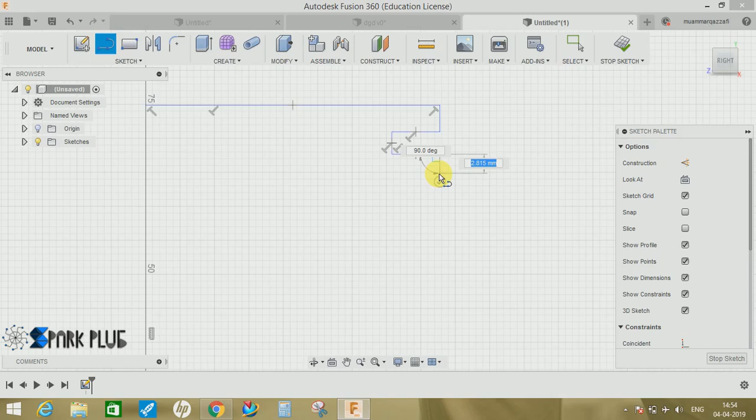Click on select sketch and click on any plane you want. Start by making a vertical line of any dimension. Now click L for line and draw one horizontal line, go back downwards, then again inward, downwards, outwards. Repeat these steps continuously 3 times, like I am doing.

Basically we are making the slots for the piston. So we have 1, 2, 3, and go down and join it with the vertical line you have just created. This is how your profile will look like.

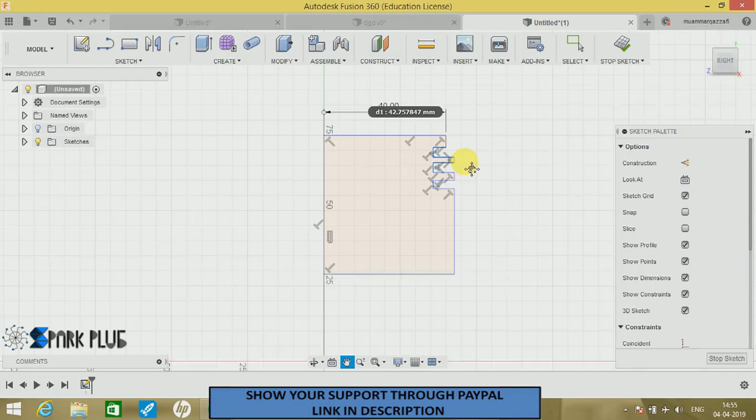Click on dimension D and give this profile a dimension of 40 mm. Remember, all the dimensions have been assumed. The focus is just to teach you guys how to do this in Fusion 360.

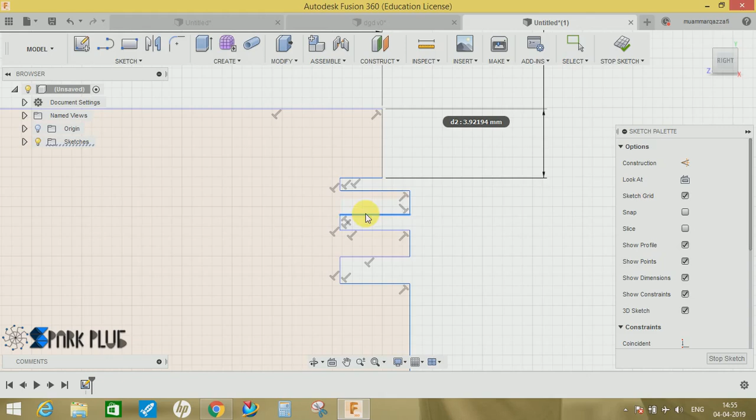Now this will be 7 mm. Let me just drag this down. Press D again, make this 4 mm. This line will be of 2.

Again this will be 4 mm. Make this also 4 mm, and make this also 4. This would be, let me just check, 2 mm. This would also be 2 mm.

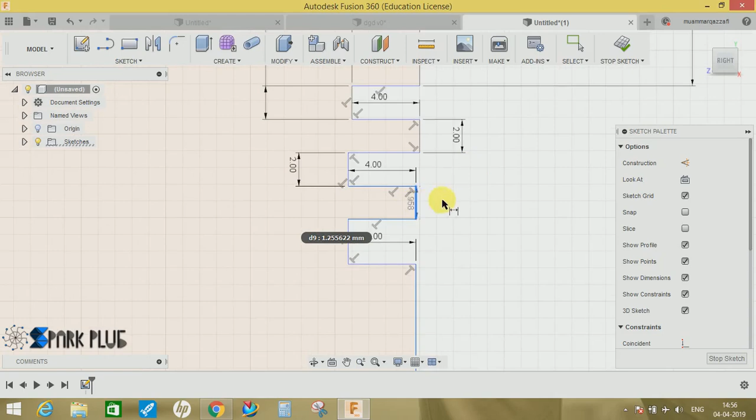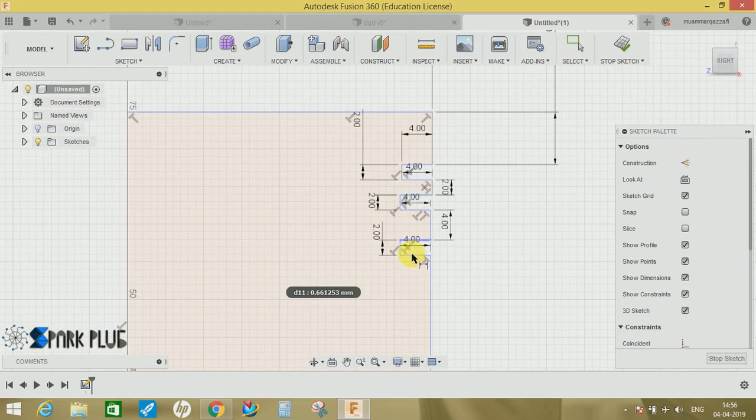The last one would be slightly larger, 4 mm. We have 1, 2, and the third slot would also be 2 mm. So this is how our profile will look like, with one slot, the second slot, and the third slot. Once done, give the last dimension to this line as 36 mm.

Once done, click on stop sketch, go to create, go to revolve, click on this as profile, and use the axis with the vertical line you have just drawn. Go to operation, click on new component, and press OK. This is our piston started taking shape.

Go to component, right click, double click, and rename this component as piston. Now again click on sketch.

Unhide the initial sketch we have just drawn. Again click on that front view, and what we have to do is draw a vertical line from this point to this point.

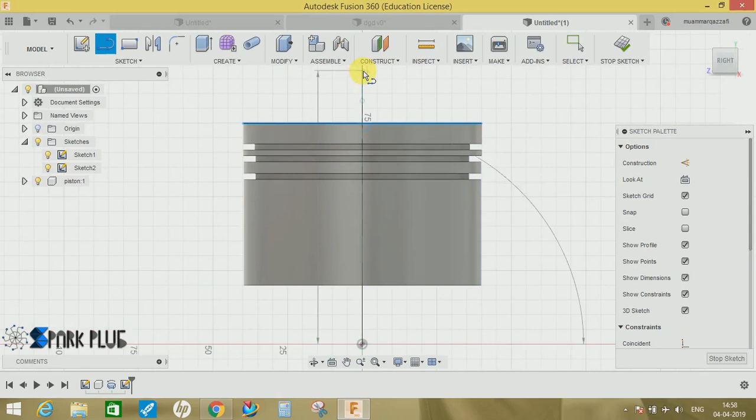On this vertical line, make a point. Click on sketch and go to point, and on this very vertical line we have to make a point. I don't know why it's not snapping, so for now just delete these lines or hide the first sketch which we have drawn.

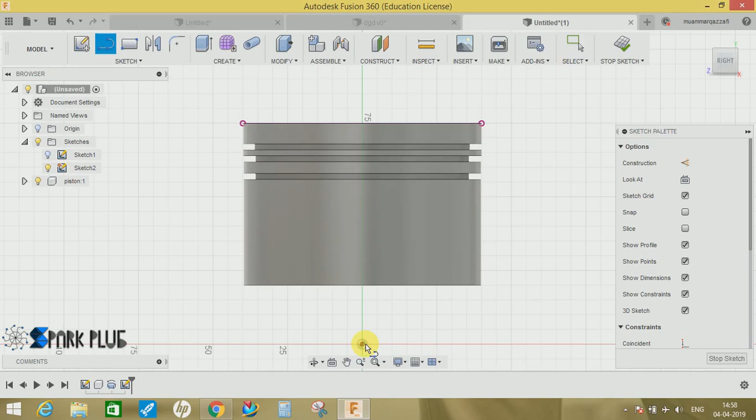Click on point from the origin, draw a line from origin, click on sketch, click on point, a point here. Click on dimension, make the dimension of the point from here as 10 mm and press enter.

Now make another point P on this curve here. Again press D for dimension, give its dimension from this point as 4.5 mm. Once drawn, click on the mirror command, select this point, and the mirror line would be the vertical line you have just drawn.

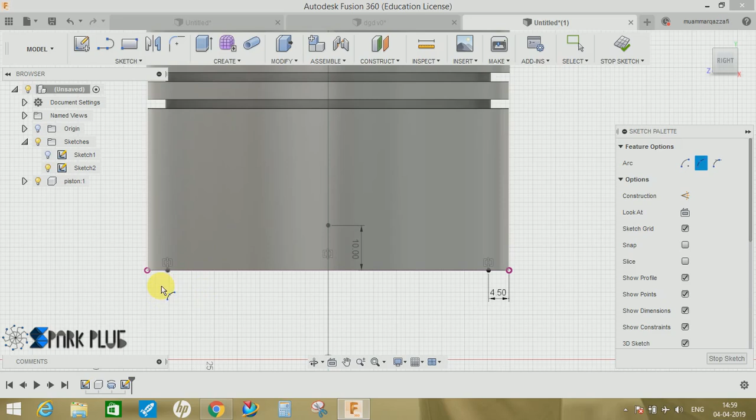Press OK. Now again go to sketch, go to arc, 3-point arc. Select the 3-point arc. The first point would be this, second point would be this, and the third point would be this. Once drawn, just close this figure as a rough sketch.

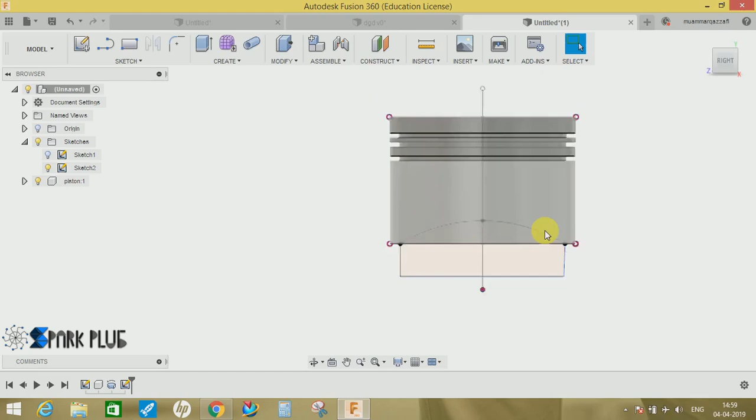Now you have just closed this figure. Click on stop sketch. Now once done, just hide this sketch for now. Again go to this, click on the bottom of the piston and click on create sketch.

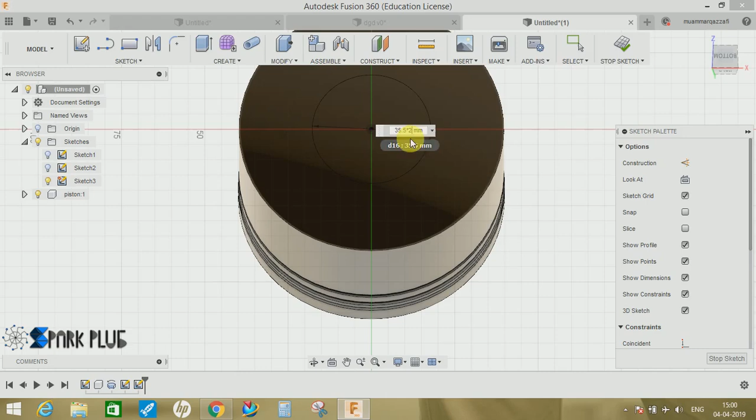From the center, draw a circle of diameter 35.5 and press enter. No, it's not diameter, actually it's radius, so we have to multiply it by 2 to make it diameter. So just make it 35.5 into 2, that's equal to 71 mm.

Click on stop sketch. Again we have to make a hole through it, reverse the direction, and the distance would be -50. Press enter. So we have created the piston. Now unhide the second sketch we have drawn.

We have to extrude cut a profile through the bottom of this piston. Click on the extrude command, select these profiles, and click on symmetry, and make an extrude cut through this profile.

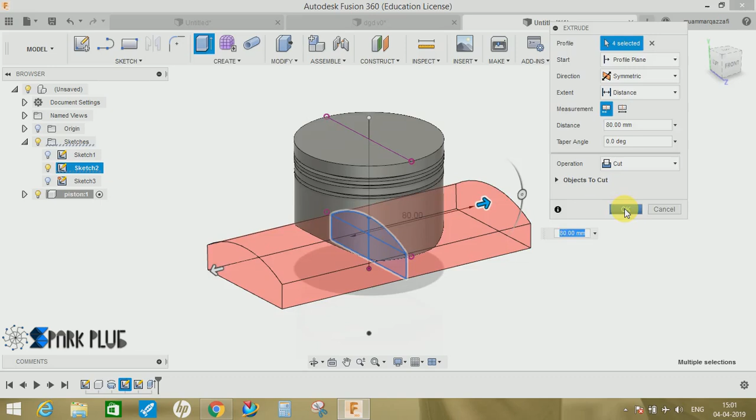Now the next step is to make a hole for the piston pin and the area where your connecting rod would be assembled. For that, again go to sketch, click on the front view, and on this very center line draw a circle of diameter 10 and press enter.

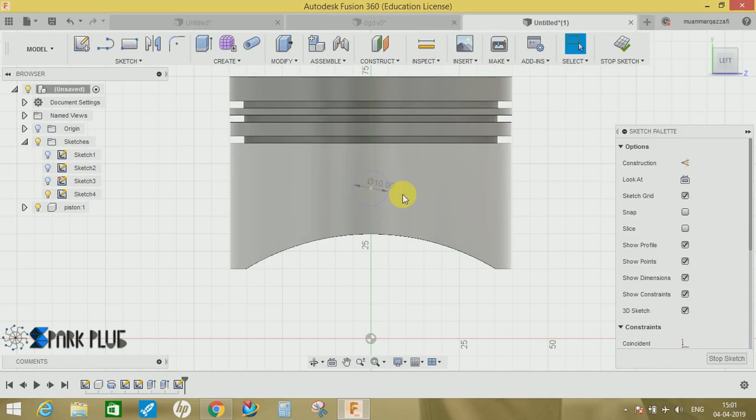Click D for dimensions, click on the center and the bottom profile, and the distance would be 24 mm. Again click on stop sketch, click on extrude command, make the direction symmetric, and cut a hole through it.

Our piston is completed. All we have to do is make a slight fillet here to look it more beautiful. A fillet of 5 would be okay, and press OK. Now the next step is to make the connecting rod.

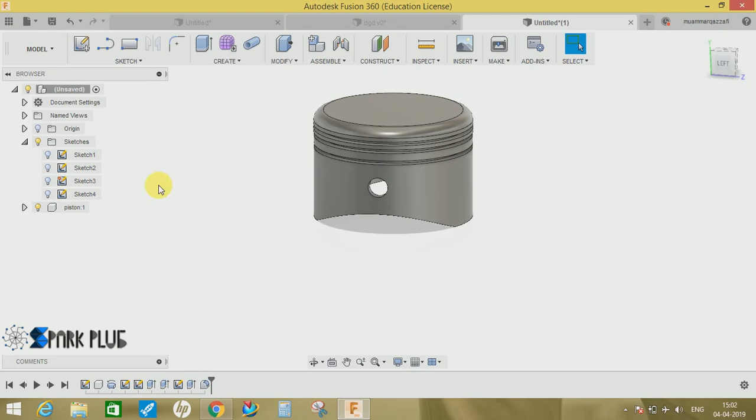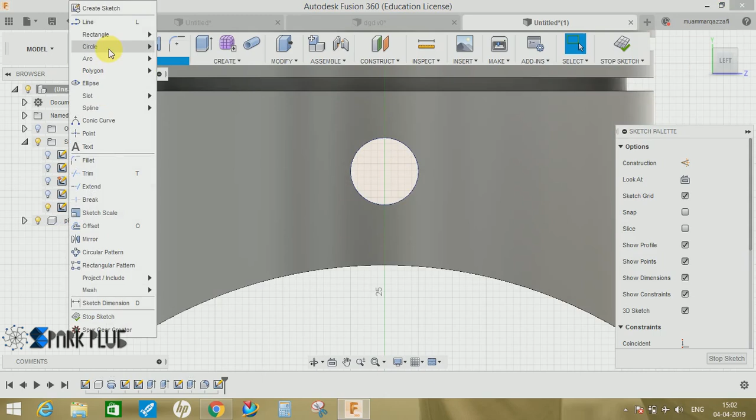For the connecting rod, again click on sketch, click the front plane, and start by drawing a circle in the middle. For that, press P for project and project this entity, then press OK. Now go to circle, center circle, and click 2-point circle, drawing from this point to this point so we can get the center of this circle.

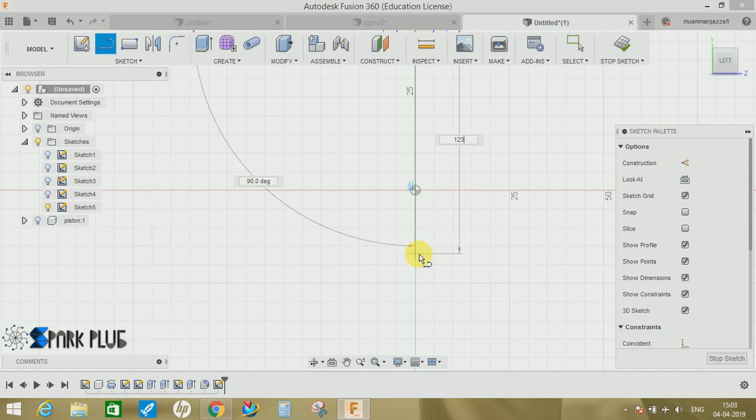Press C for circle and draw a circle of diameter 17 mm, press enter. You can hide the piston from here for now, you don't need it. Click on line command by pressing L and draw a vertical line of length 123 mm, press enter. Once drawn, click C for center circle and from the bottom of that line draw a circle of 46 mm diameter.

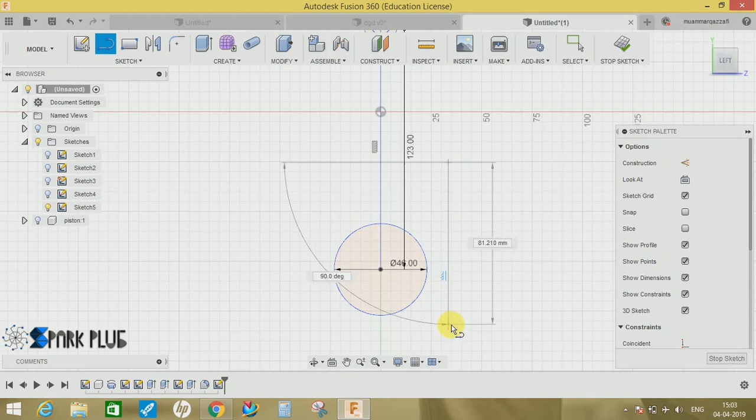Then draw a vertical line just beside that circle, press D for dimension, and give the dimension from the center as 36 mm, then press enter. Now press L for line, draw a horizontal line from the center of this circle, press T for trim, and trim these two lines. Then we have to make two tangent lines from this point of the circle.

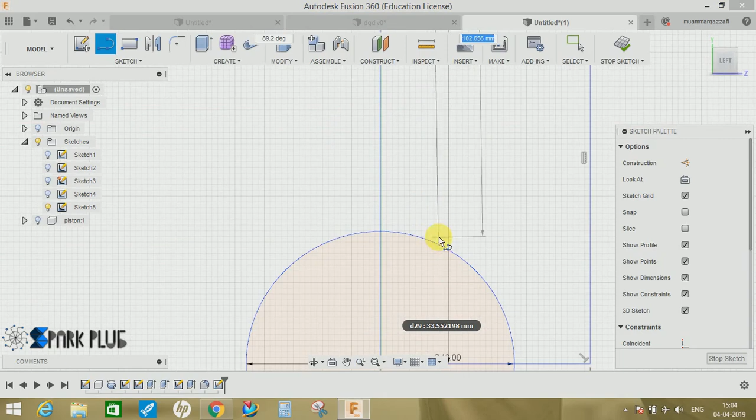Press L for line, from this very point draw a line vertical, parallel to the center line, up to somewhere here. Now press dimension D and make the dimension of this line as 25 mm.

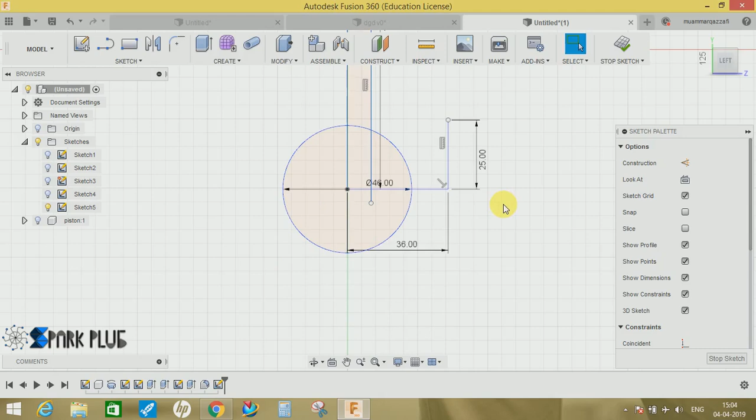Now we have to undo this. First, make this circle by clicking on the center point, right click, and click on fix, so it cannot be moved from its original position. Now rename this dimension as 25 mm.

Press L and join these two lines, then press T for trim and cut the extra line. Now choose the fillet option, click on this line and this line, and give it a fillet of 25 mm.

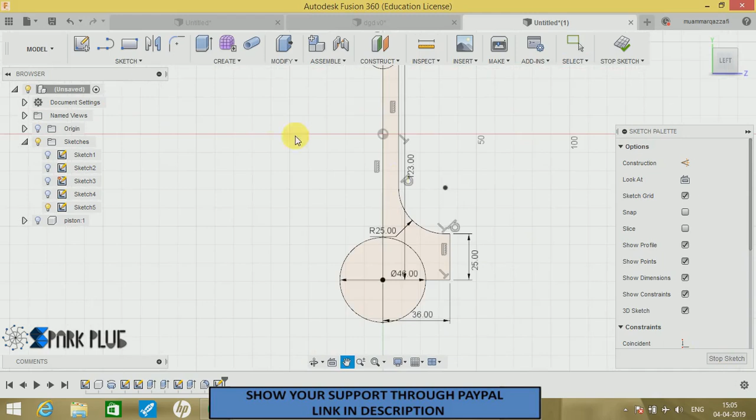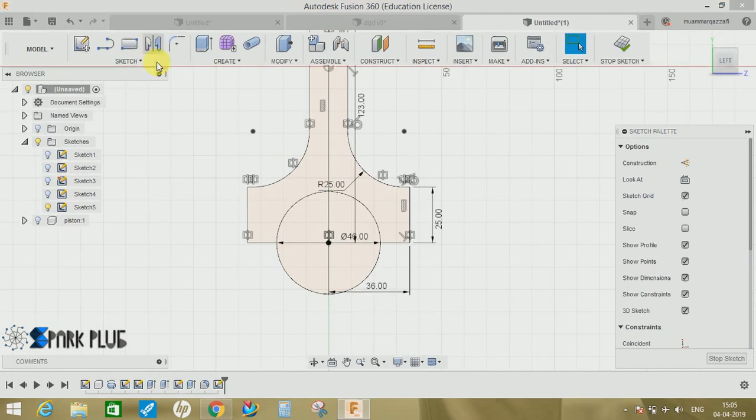Press enter. Now click on the mirror command, select this entity, this radius you just created, and all the lines you just created. The mirror line would be the center line again, press OK. Now mirror these two lines again with reference to this line, press OK.

Now join these two lines so that we have a closed entity. Next step is to make a slot between these profiles.

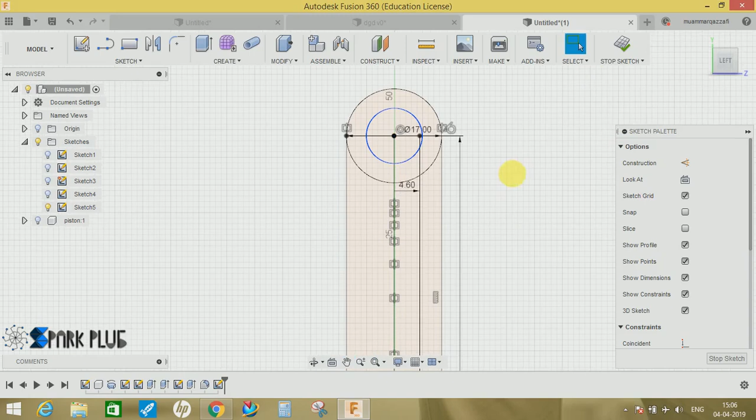For that we have to click on sketch and go to offset. Click on the center line and offset it to a distance of 4.6. Do the same on the other side, or you can mirror this line like this.

Next, draw a circle on the center line with diameter 9.2, so it becomes tangent to this line. Press D for dimension and give the dimension of this circle as 15.

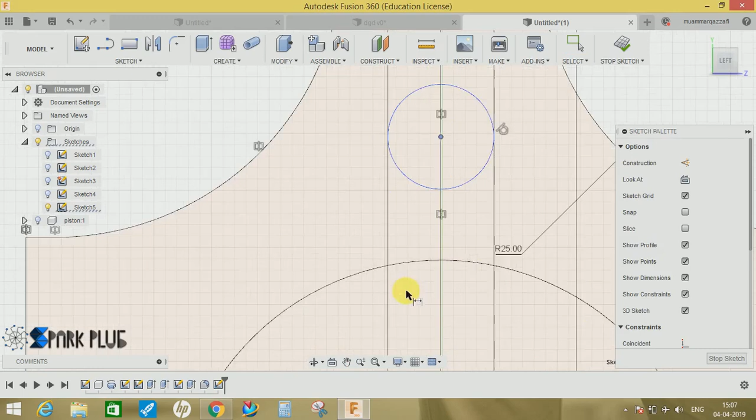Same thing would be done here. Draw a circle on the center line, joining these two lines, and give the dimension of this circle from its center as 35.

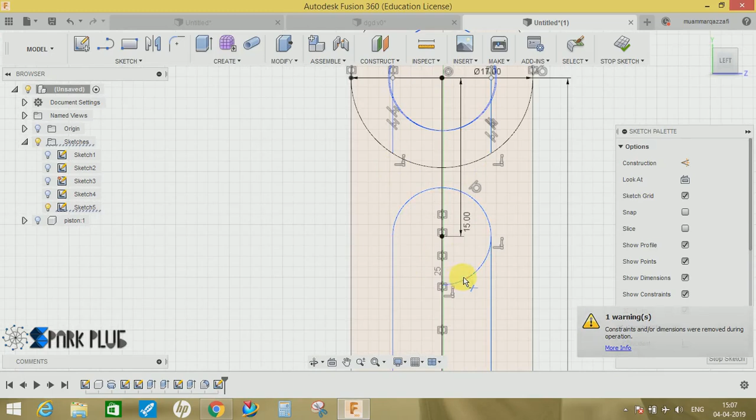Now we have to trim some extra lines. Press T for trim. We have to trim this line, this one, and similarly here. Just delete this excess line.

I accidentally deleted the circle by mistake, let me delete the projected one. We can make the circle again here. The diameter was 17 - sorry, the diameter was actually 10. The smaller circle was 10 diameter.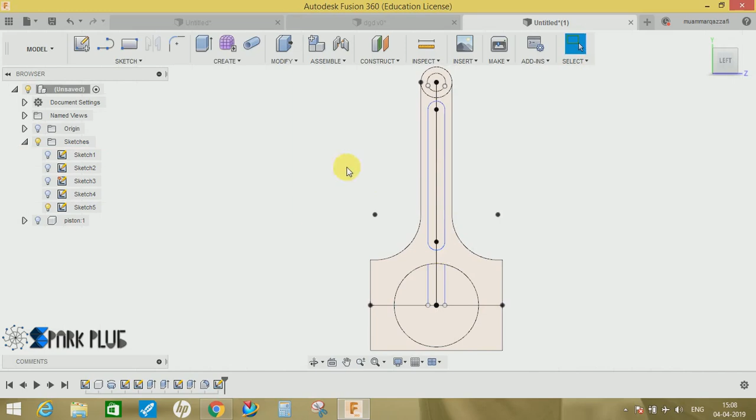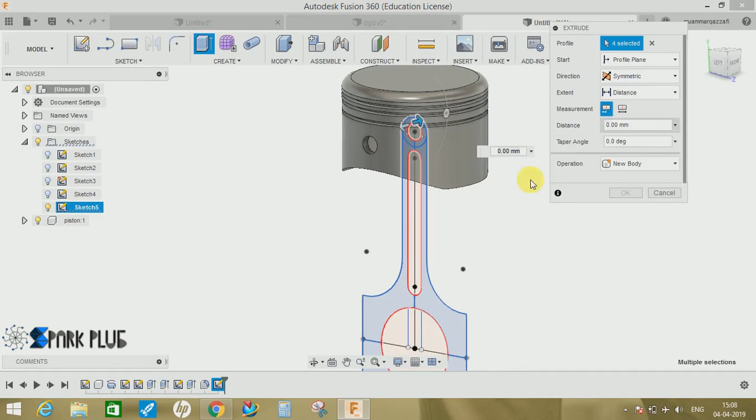Once the sketch is completed, click on stop sketch. Now bring back the piston like this. Again click on extrude command, select the faces like I am selecting, except for this hole, this slot, and the slot here which will be for the piston pin. The direction would be symmetric, and this time the distance would be 10 mm both sides. Click operation as new component and press OK.

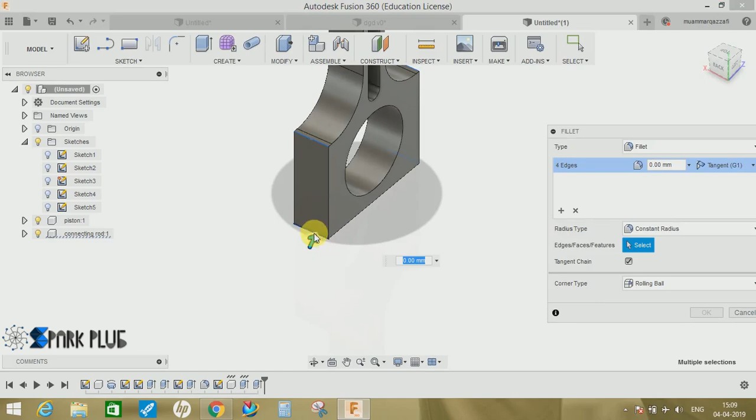Now rename this component as connecting rod. Before moving forward, go to modify, go to extrude, extrude the lower face by 5 mm and press OK, join. Now go to modify, click fillet, select this edge, this one and this one also, give it a radius of 14 mm and press enter, so we have a beautiful connecting rod made here.

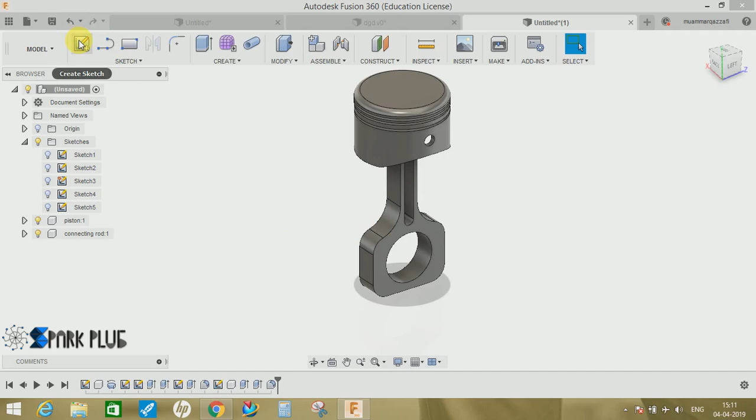So the next step is to make the crankshaft. To do that, click on sketch, click on the front plane, the mid one, and press OK. Now press C for circle, but before that press P for project and project this entity onto the plane you just created. Press C for circle, and from the midpoint of this profile draw a circle of 70 mm diameter.

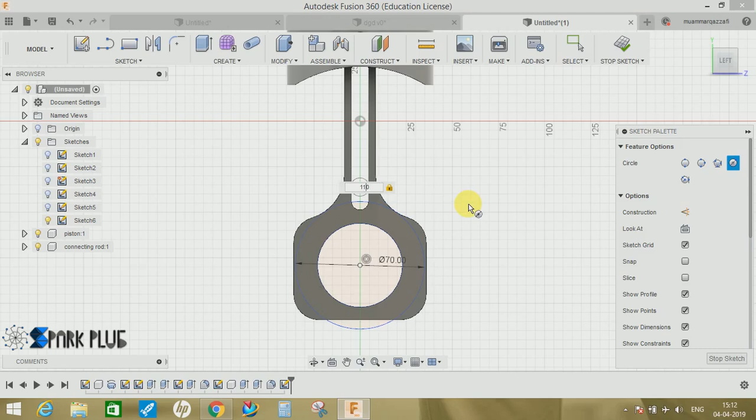From this point again click project, making the projection at some point higher than this point. Draw another circle of 110 mm diameter. Now right click on this circle, the first circle, and make it fixed. Now again press D for dimension, and make the dimension of these two circles as 36 mm.

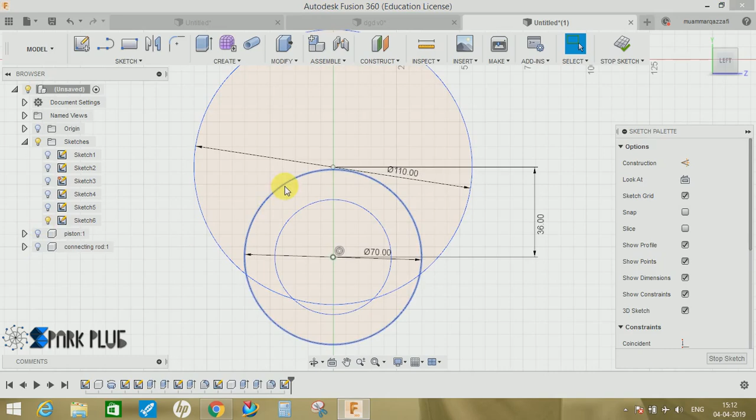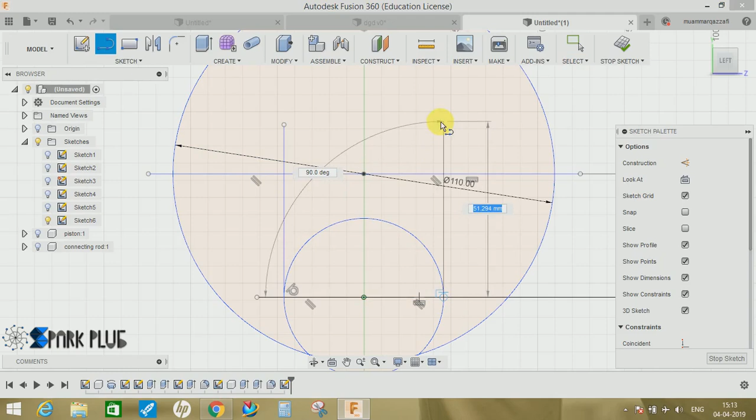Press L for line, draw line 1 from this point horizontal both to left and right side of the circle. Repeat this step in the smaller circle also. Now once done, press L for line, and from this point draw a straight line cutting to the horizontal line of the bigger circle. Again press L and repeat the same step for here. Again draw a vertical line, press T for trim.

Trim this excess entities that we don't need. Just follow my step and just remove the excess part that is not for our use.

Now once done, click on the fillet, click on this sketch and this and this and this, and make the radius of 25 mm and press enter.

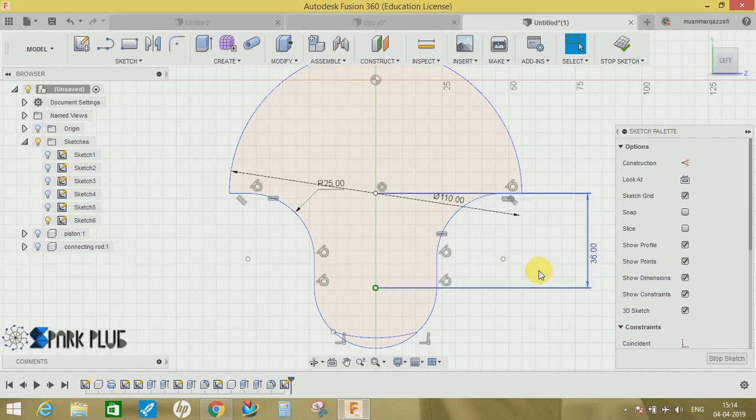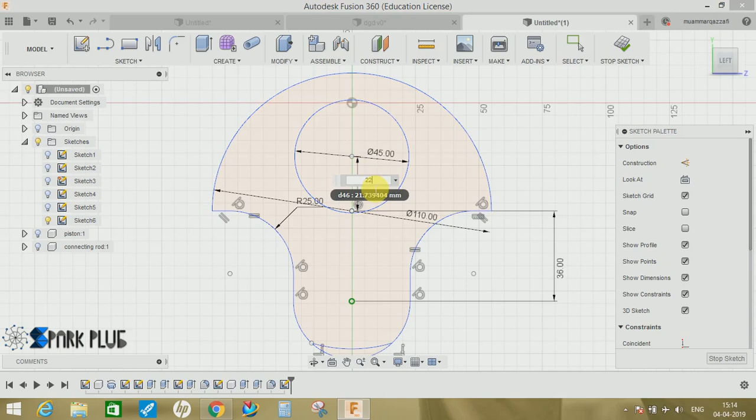Once done, on the same projection draw a circle of 45 mm diameter, and the distance from this point to this point would be 22 mm and press enter. Once done, you can just stop the sketch.

Now bring back the piston and connecting rod once again, and what we have to do is we have to create an extrude of this profile. So click on this profile and extrude it up to a distance of 25, and click on new component, make it 20 mm.

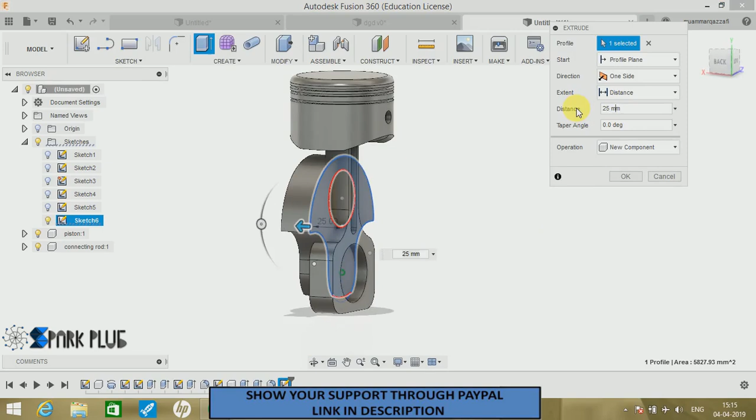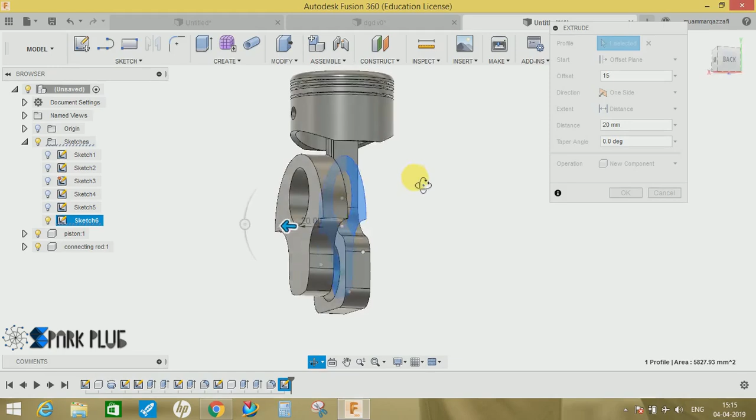The next step is to click on start and click on offset plane. So offset plane would be 15 mm. It will look somewhat what it would look like this. So once done, press OK.

Now again click on extrude, bring back the last sketch we have drawn, repeat the same step but on the right side this time. So for that there is two options.

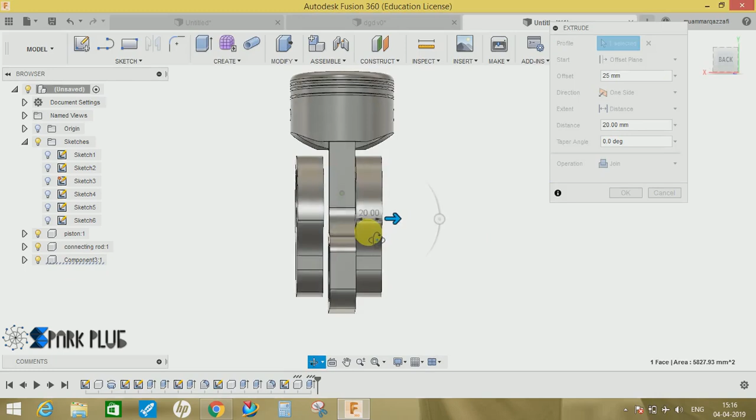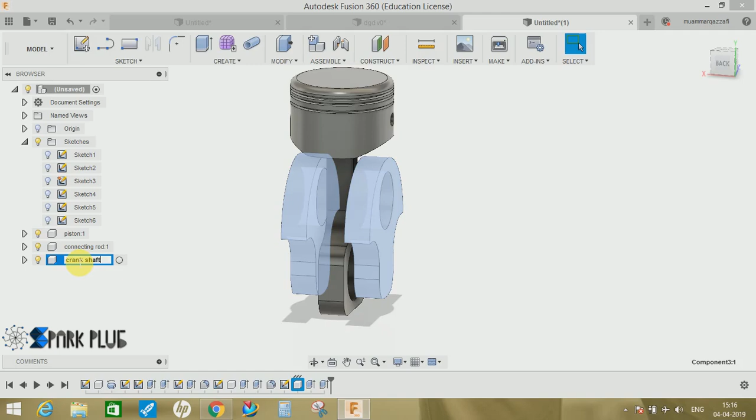So we have a new body here. We name this as connect crankshaft. Now we have to make a joint between these two so that they can move with respect to each other.

For that, we for now just hide the piston and the crankshaft connecting rod as well.

Now again click on sketch, click on this face, and you can press P to project this circle, press OK, click on stop sketch.

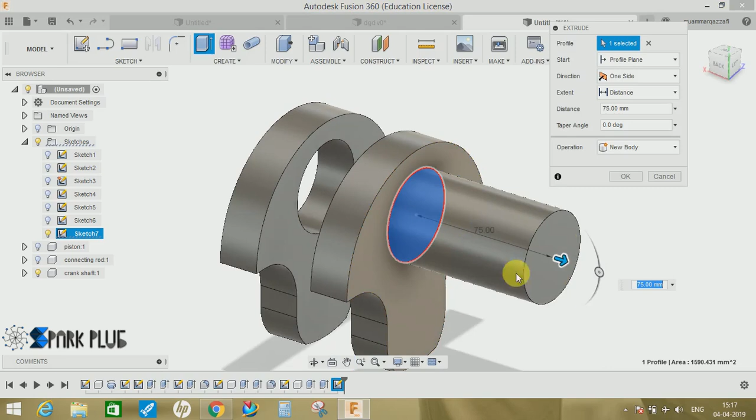Now click on extrude it up to a distance of, I need roughly distance, we don't need to give this an exact dimension. Click on symmetric, click on no, click on two-sided, and the second side would be, first of all we have to just make it on one side only.

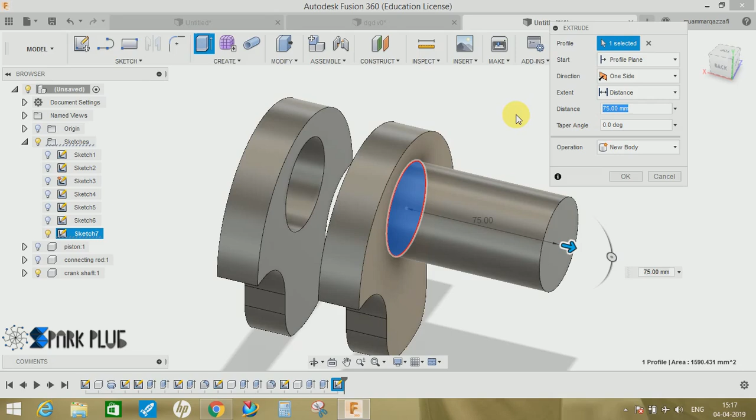Click on one side and give it any dimension, let's say 75 mm. Click on join, and now click on two side and make a fillet.

Press OK. Now again click on extrude, click on this profile, go all the way up to here, click on join, again two-sided, make this side somewhat like here and press OK for join. So we have a profile that looks like this.

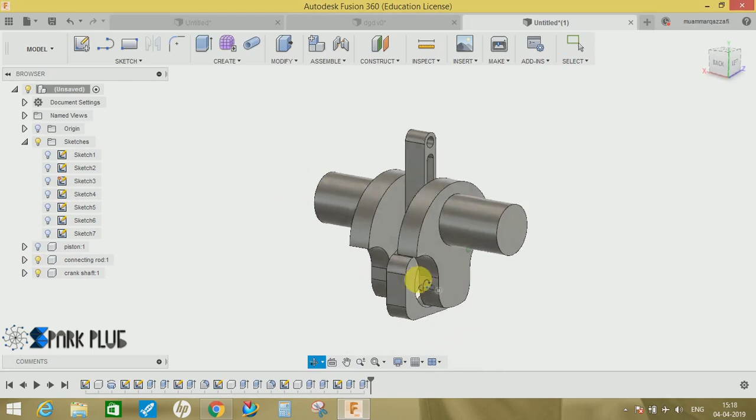Now bring back the connecting rod. What we have to do, we have done something wrong in the previous sketch we have drawn, so we have to make a correction. Actually, we have created a hole which is larger than the crankshaft we have created.

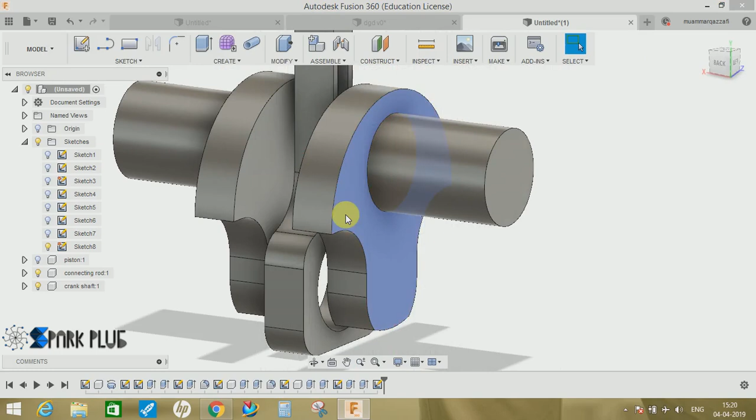So for now, just go back to the 3D environment and bring back the sketch for the crankshaft we have drawn initially. So in that, double click on this sketch so that we can edit the profile. So just hide the crankshaft for now.

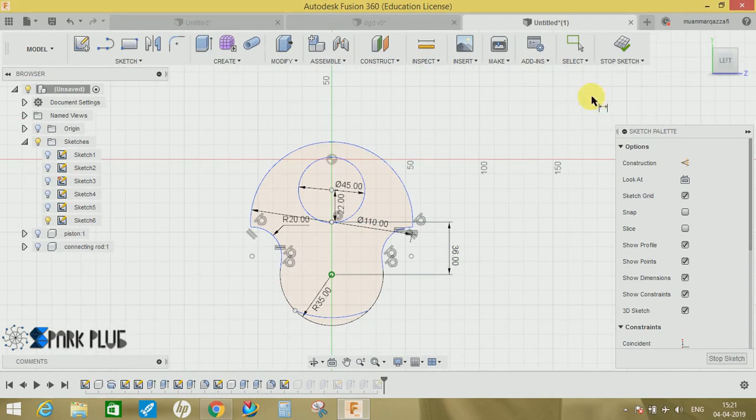First of all, change this radius to 20, and the next is to press D for dimension and give the radius as 23 mm now. Make it as 35 mm and click OK. Now all the rest are OK. Just stop this sketch.

Again we have to go back to the timeline. Find the extrude that we have used to make this profile. Select this curve also and click on join and press OK.

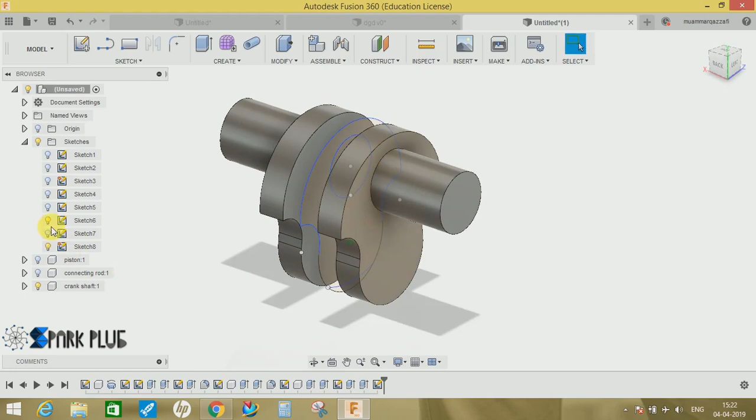Now we have just created the crankshaft, a perfect one. Nothing is wrong in this. Again let's move forward. For that, bring back the connecting rod as well as the piston.

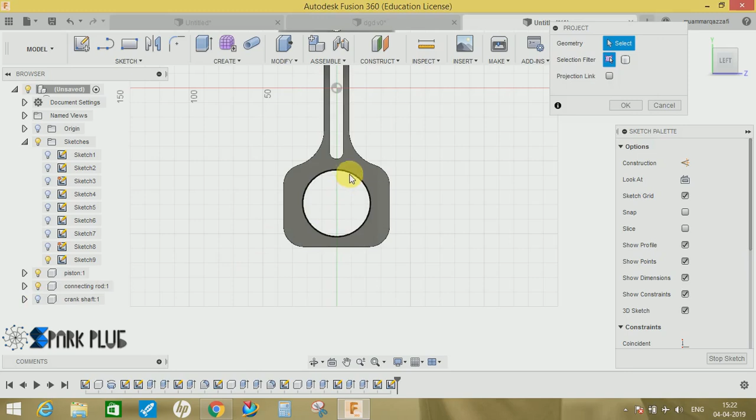For now, click on the sketch, the center one, and press OK. This to hide the crankshaft for now. Press P to project this. Press P, select this profile and press OK. Now stop the sketch.

And click on extrude button. Bring back the crankshaft. We don't need the connecting rod now. So what we have to do is we have to select this, click on symmetric and extrude it till it merges with the crankshaft, and the operation would be join and press OK.

Bring back the connecting rod. So we have created all the necessary elements that are needed for the assembly of the piston cylinder.

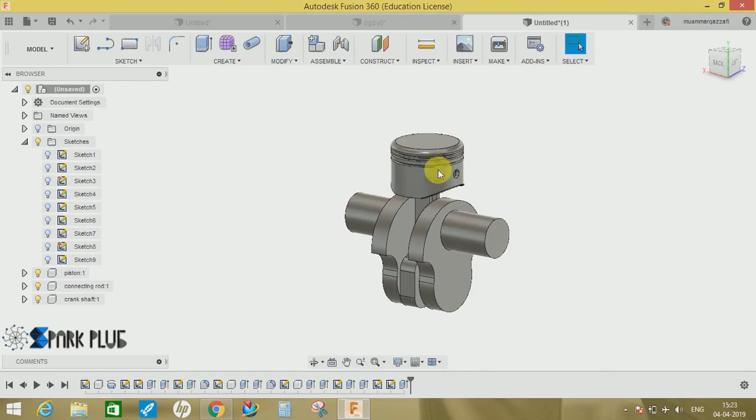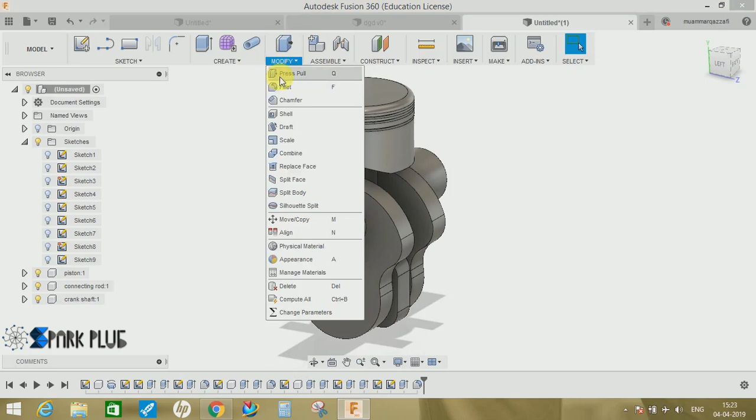Just for now, make some necessary fillets to make your thing look a little bit more beautiful. So give this profile a fillet of say 20 mm and press OK. Again, do the same thing with all the faces.

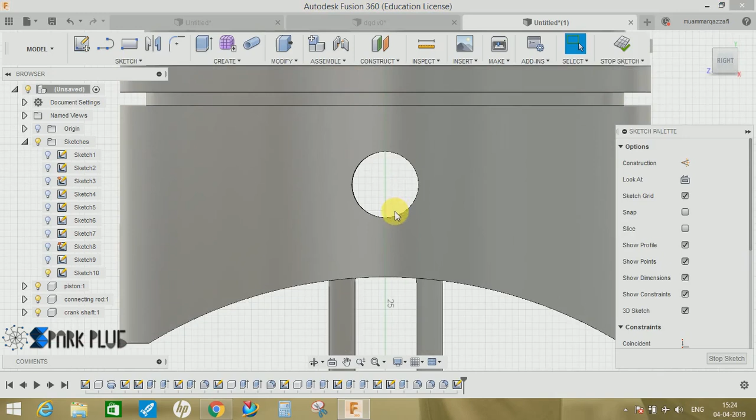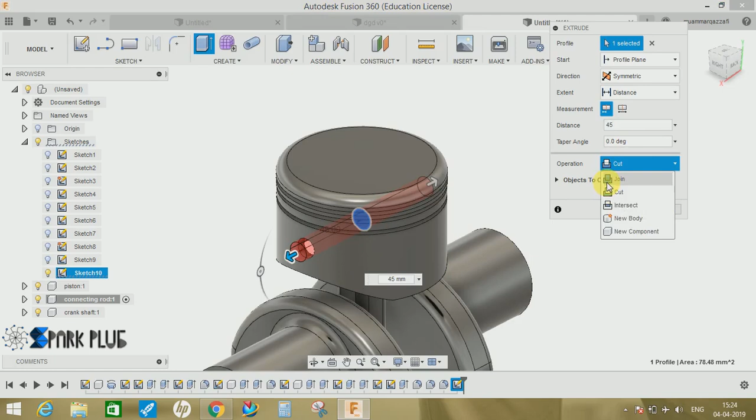Once done, the last thing we have to make is the piston pin. Click on sketch, click on the center one, press P for project to project the circle, and press OK. Click on stop sketch, then click on extrude, select this, make the distance symmetric, and extrude it up to a distance of 45, with the operation as new component, then press OK.

Rename this component as piston pin and press OK. Now again, just like before, do some necessary fillets to make it look more beautiful.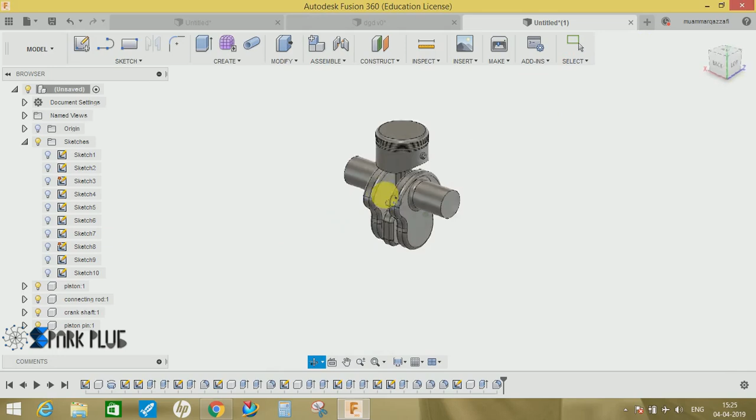Now the only thing left is to assemble these parts so that they can move according to each other. Revert back to their own initial position for now, and let's start making the assembly. For now, just hide the piston, connecting rod, and piston pin.

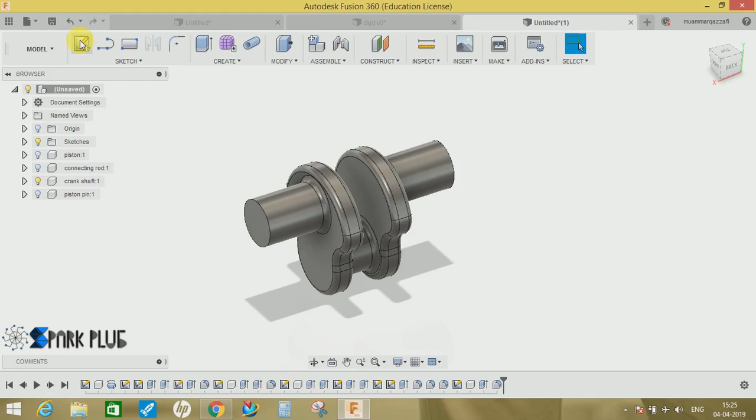Start by assembling the crankshaft. We need to rotate the crankshaft according to this axis. For that, we need a particular component that will act as a stationary grounded component for the assembly. So click on create a sketch, click on this plane, and draw a circle from the center of any dimension.

Click on sketch, stop sketch. Extrude this profile and click on new component. We don't have to rename this component, just right click on it and make it grounded. Now you can move this, but you cannot move this component. Revert back to the initial position.

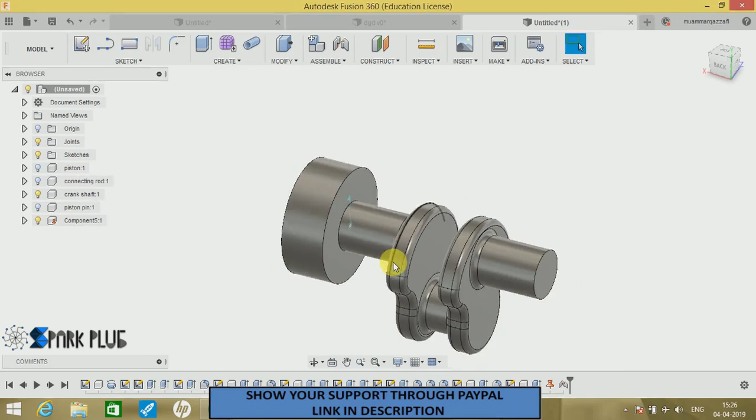Now click on the joint command, select this circle and this circle, and make the relation revolute. Once done, press OK. Now we can rotate this component with respect to this body.

Just hide this body, and you can see we can rotate this component according to its axis. Revert back to initial position. Bring back the next component, the connecting rod.

For that, again repeat the same steps. Let me just measure the distance between two faces. It's 30 mm. So for that, again click on joint.

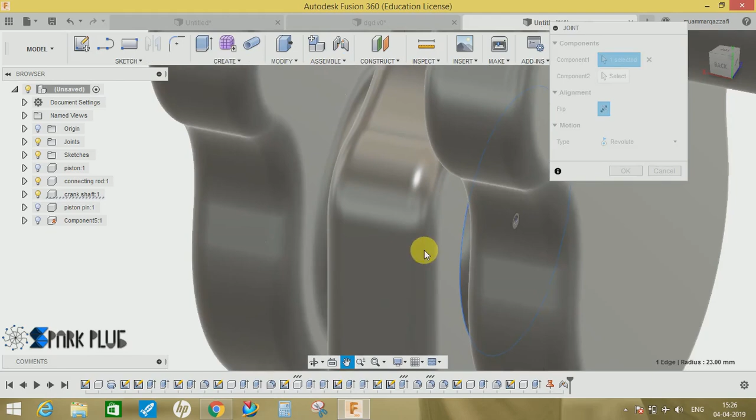Click on this face, the circle, and repeat the same with this, and just like before, create a revolute joint between them and press OK.

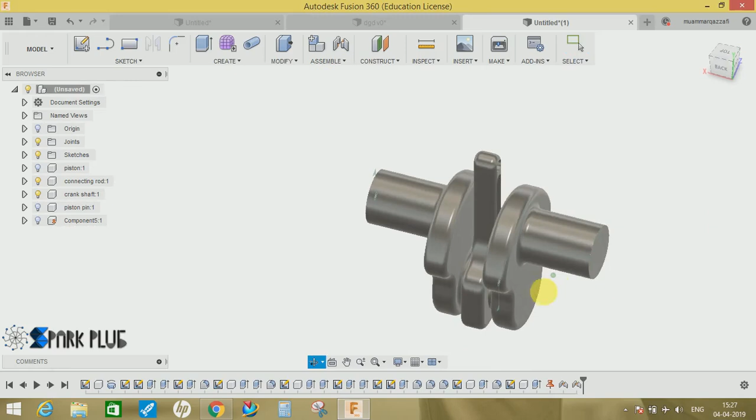Now you can see that we can move this as well as this on this axis. Revert back again. Now we have to make the piston assembled together to this connecting rod.

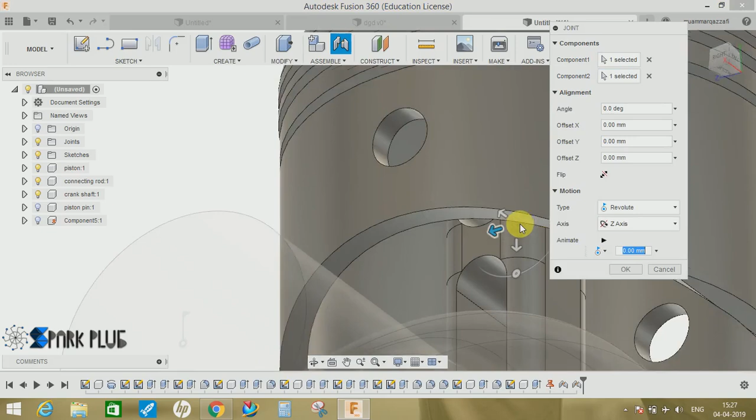For that, again click on the joint command, select the face of this and draw, click on the middle point, press Ctrl, click on the middle point of this. Now you can see again we need to make the joint.

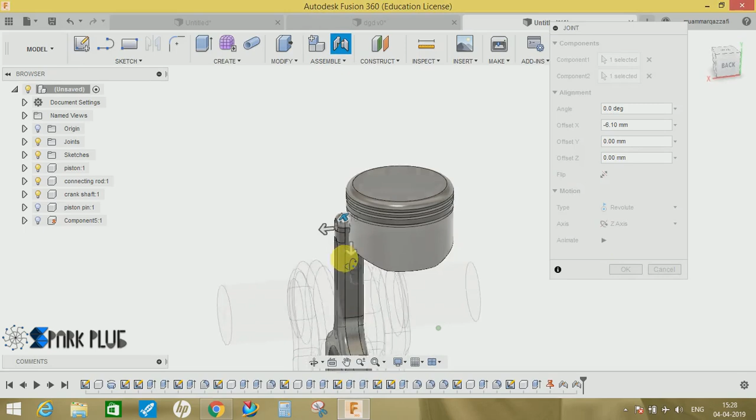Make it a revolute joint like before, but make sure the piston is placed in the middle of your profile. So move it to the left side to a distance of 6.10 and press OK.

Now the assembly is completed. Only one thing remains: as you can see when we try to move this, it has no particular direction to move along. So we need to define the direction of the piston to move across a vertical profile. For that, revert back to the initial position.

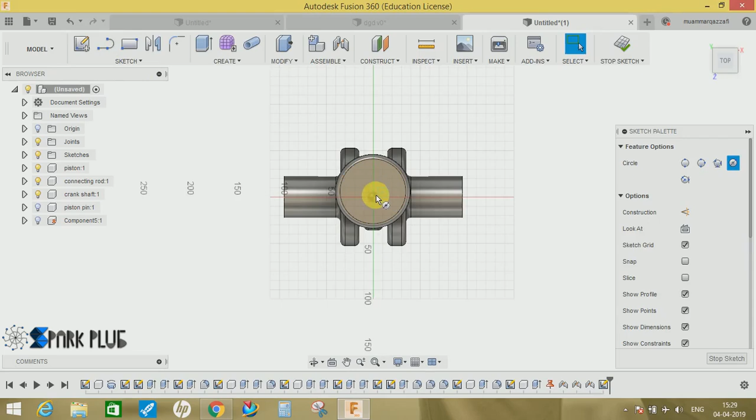Again click on sketch, click on top of the piston and draw a circle from the center point of the piston of any dimension, and stop the sketch. Just click on extrude, extrude it, click on new component and press OK. Again, make this component grounded.

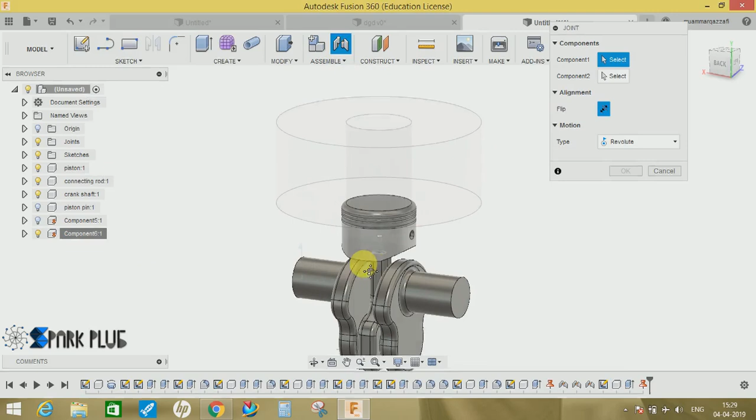What we have to do is create a slider mechanism joint between the piston and this profile. Click the center of the circle on the piston, then the center of the profile we just drew. This time the motion type would be slider. Click on slider and set the axis as the z-axis, the vertical one, and press OK.

Now hide this component, we don't need it right now. If I try to move the piston, you can see the joint is now defined and the piston moves accordingly. This is how a piston assembly works in Fusion 360.

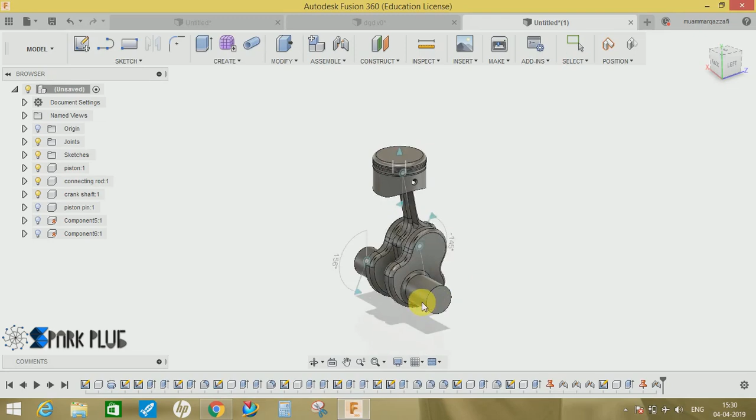Now the only thing left is to assemble the piston pin. For that, revert back to the initial position. Now we have to make a joint between this and this.

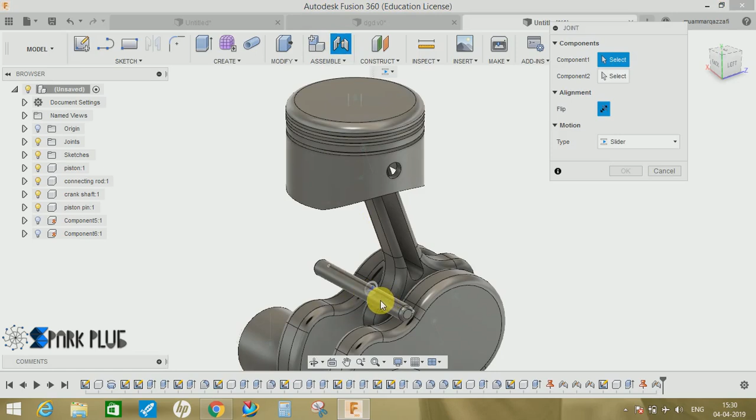For that, click on the joint command, zoom in a little bit, press the circle. We need the circle. Why am I not getting the circle? I think it's not a perfect circle, so I think you guys can do that part yourselves.

What we have to do is make a rigid joint between this piston pin and the hole we created initially in the piston. Just hide it for now, and you can give it a nice appearance so it looks like this.